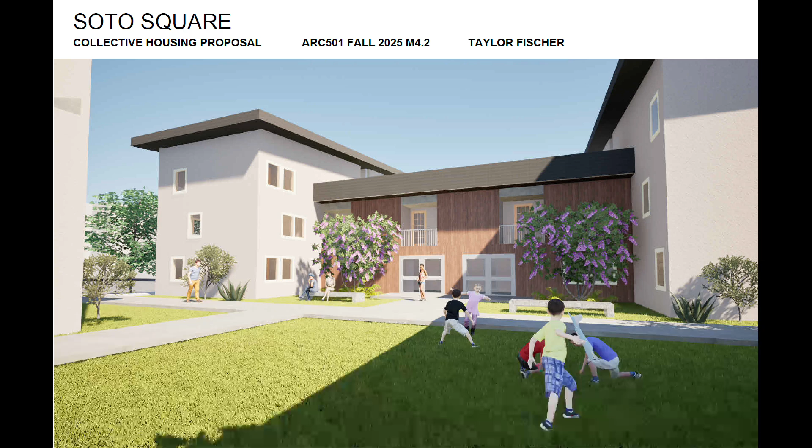And welcome. My name is Taylor Fischer, and this is my ARC501 final presentation. Today, I will be presenting my project Soto Square, which is a collective infill housing project and proposal.

A little bit about the community history of where my proposal is located. The neighborhood is Boyle Heights, a sub-neighborhood of the greater Los Angeles area. Here we have some site history and environmental context, along with my findings that Boyle Heights carries a very strong cultural identity rooted in Latino and Chicano heritage. Affordability is a pressing challenge, especially with the zoning incentives aimed to preserve access to the existing community, to help push back against the gentrification they're seeing.

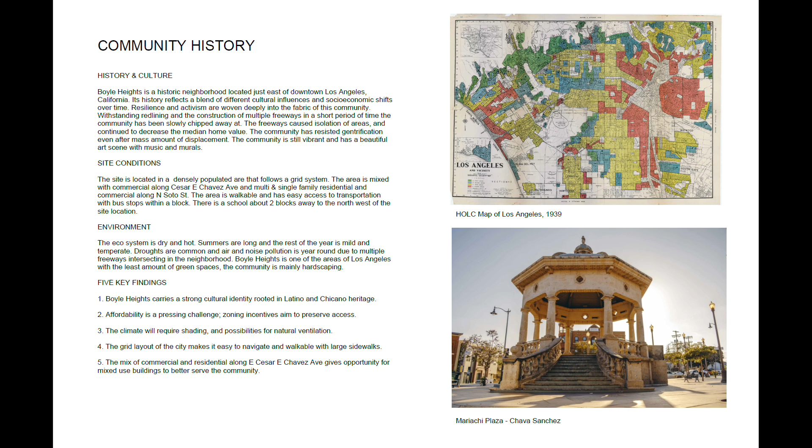The climate in this area is extremely dry, and Los Angeles, as most of us are probably aware, has faced some pretty severe wildfires over the last several years. The grid layout of the system within the city makes it fairly walkable, and they do have large sidewalks, so community access to buses, community transportation, and walking along with biking is a big priority.

Some community takeaways, along with a rough site plan and a map of the surrounding area in a black and white context to really show just what the density of the area looks like.

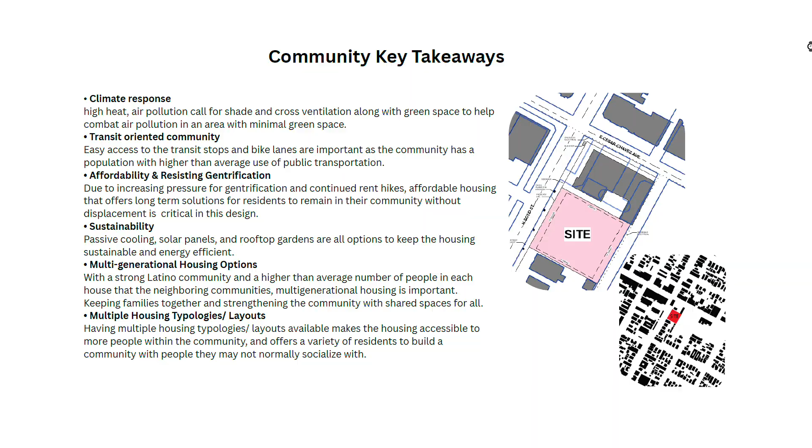For this project, I focused on 5 different possible community members within this area, ranging from a single local college student to a multi-generational family with children and adults.

Here we have the site plan that shows the first floor along with the main street and then the back alley that would be used to access the parking lot. I really wanted to focus on having everything be able to move through this area between the 2 streets, just to keep that open flow going and really invite the community into this area.

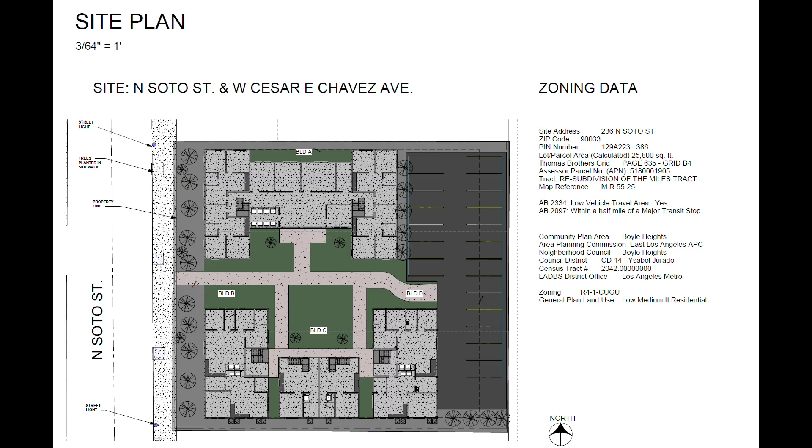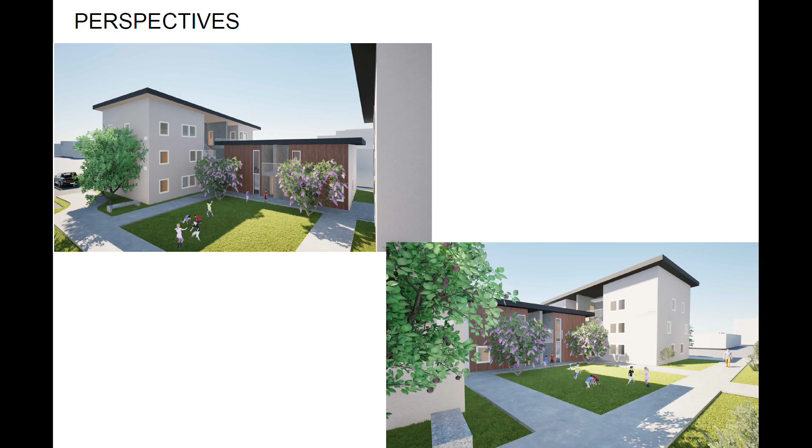Here are some perspectives that we have of the buildings, showing some kids playing in these nice courtyards along with the paved paths to and from both the street and the parking lot.

When I was doing these perspectives, I really wanted to emphasize that this is going to be a place where children and families are, along with including nice outdoor spaces that can be used for gathering. This community really appreciates space that can be used for gathering, events. It is a very tight-knit community.

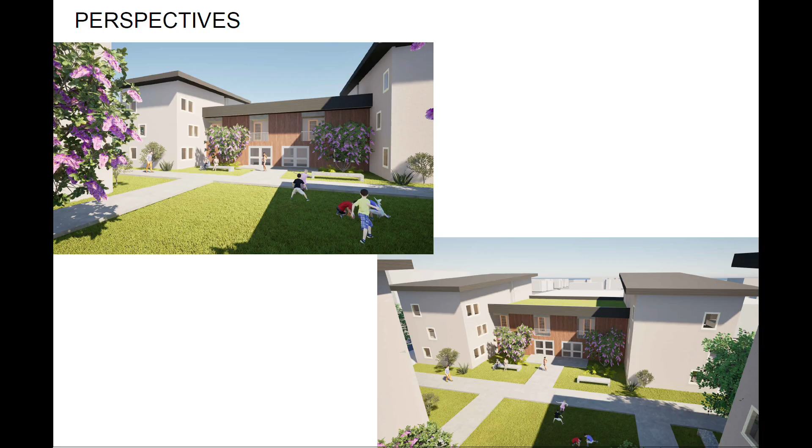This ADA unit is a single bedroom, but it is right next to the 3-bedroom, so it could be used as generational living if need be.

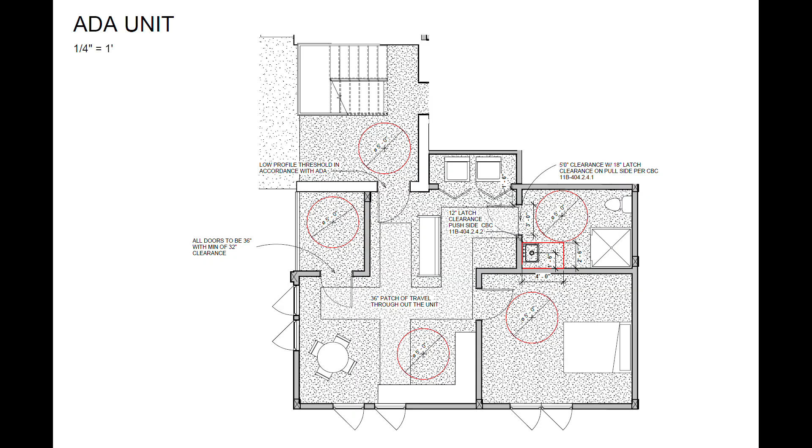The shared and public spaces are in the larger of the 4 buildings, Building A, and we have 3 community rooms that we will focus on using for after-school projects, such as tutoring, classes, community outreach, and pop-up clinics, along with having laundry in the main area for these spaces.

Along with a large lobby, a mailroom, and the rental office. Buildings B, C, and D have in-unit laundry, but this is also an option.

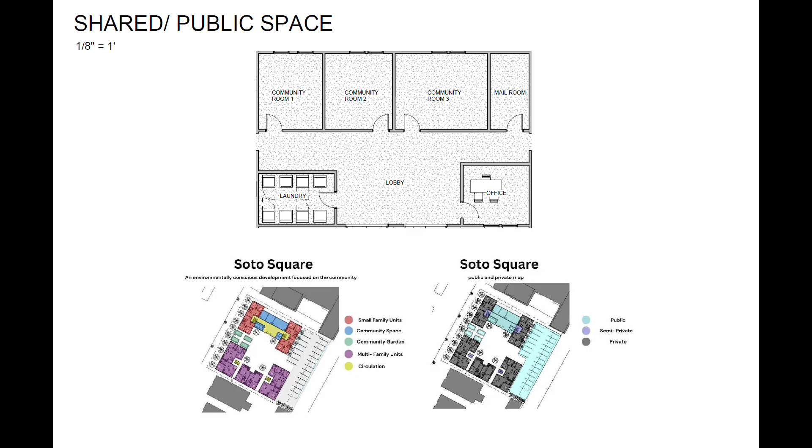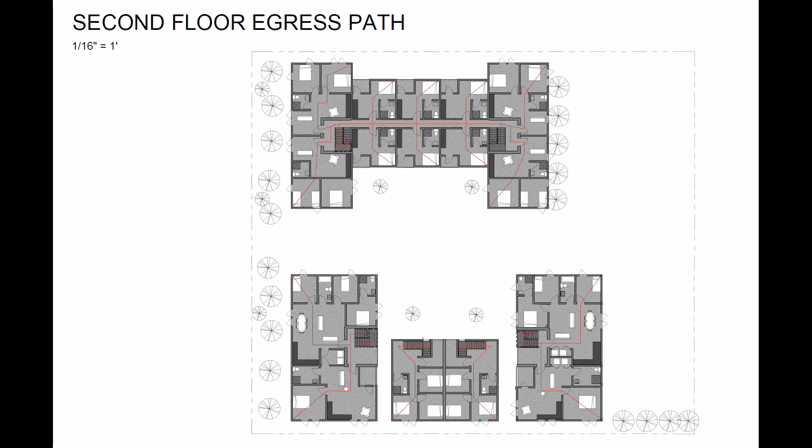Again, we have the second floor egress plans all meeting code, and the third floor also having access to the rooftop garden.

Sections and details. So these buildings are going to be heavy frame timber to keep emissions low, use local products, and hopefully have a less significant excavation and footing, trying to really keep that cost down while keeping the products high in quality and low in emissions.

These products can also be prefabricated and go together a lot quicker than average construction, which saves time and money and will help get people into these units sooner rather than later.

You can see in the wall detail and in the roof detail that there is a continuous insulation to really keep the heat out in the summer and the heat in the winter, as it is a dry area, so the temperature does tend to swing a little bit, especially getting fairly hot in the summertime.

The stucco siding will help act as a thermal mass so that the insides of the buildings do not get too hot, along with also being part of the local vernacular of the aesthetic.

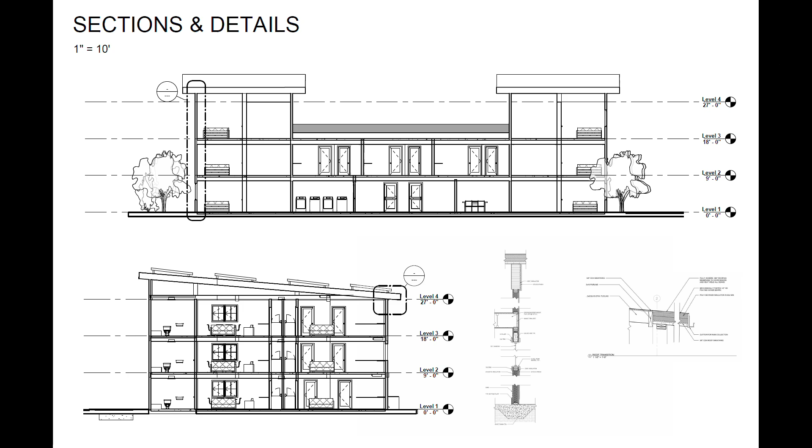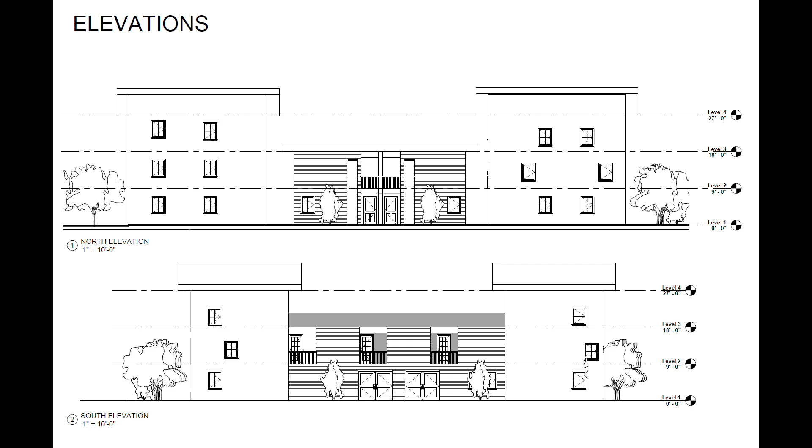Here we have some elevations showing that the central area, both on Building A and Building C, will be wood. Horizontal wood will help break up this mass so it looks smaller, give it some similarity between the two sides of this project, and also feel warm compared to the stucco, which at times can feel kind of cold and concrete or a little bit hard.

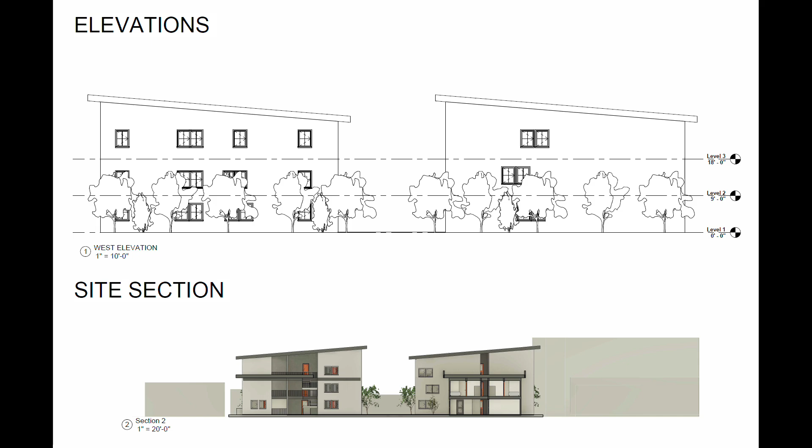Another elevation along with a site section. I tried to keep these buildings to 3 stories just because the surrounding buildings are flat roofs and tend to be fairly low profile. There aren't any high rises directly around this site. Specifically, it is single story or 2 story buildings, a lot of residential, mixed use, and small businesses.

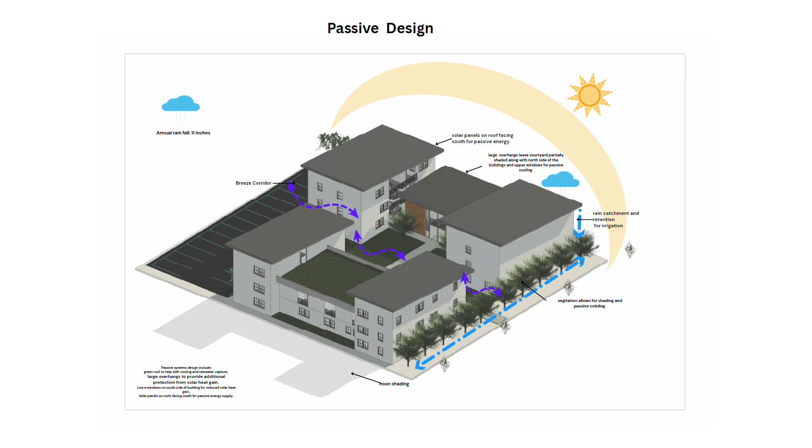Passive design flow to really emphasize trying to keep the units comfortable with comfortable temperatures while also saving money by consuming less energy.

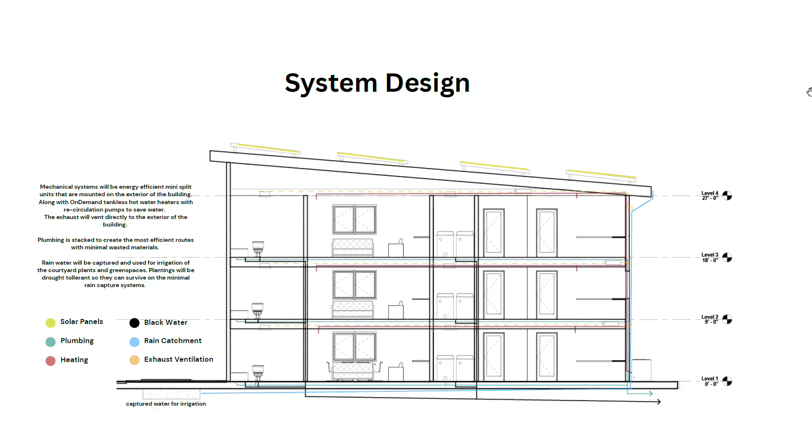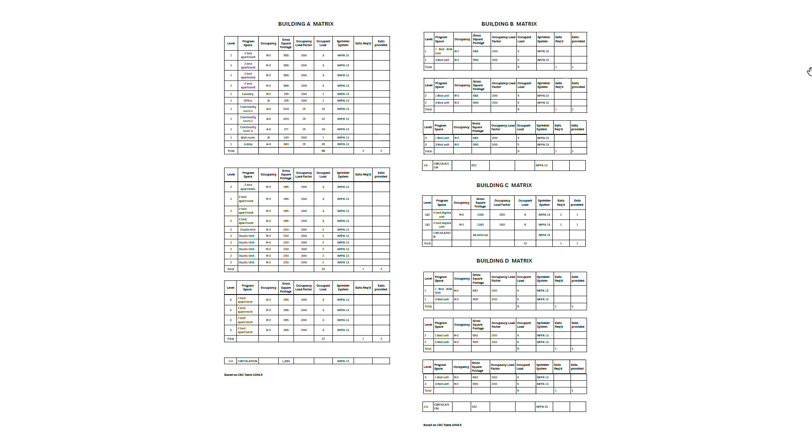And then here the building matrix. I split it out by building and then by level. But as you can see, they are fully sprinkled, which will help in the case of a fire and to help preserve the units, along with they all meet required access for exits.